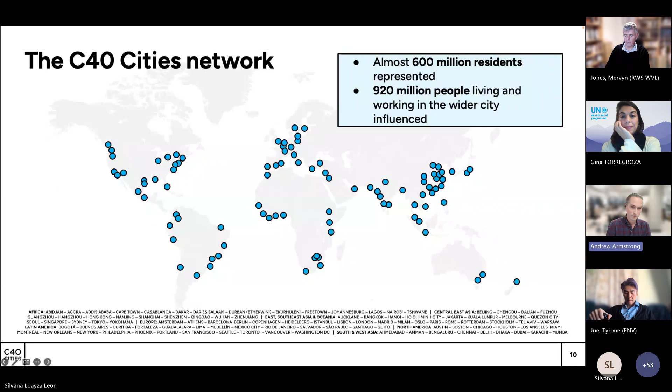So if that's who we are, a little bit of what we do. We do cover all sectors, but my focus and the topic of today's discussion is on energy and buildings. Focusing on building policies, mandatory performance standards. We look to support cities decarbonizing their energy supplies, switching away from fossil fuels towards clean energy and clean heat. But also, crucially, we look at embodied emissions as well, to address those hidden emissions of the built environment. And the term we use for that is clean construction, which we'll hear a little bit later on as well.

As we can see, buildings and industry account for the vast majority of emissions in C40 cities, and that energy use in those buildings contributes to air pollution issues as well. So how do we support cities? It's a peer sharing network. We focus on knowledge exchange and peer-to-peer learning. We also deliver direct technical assistance as well.

Crucially today, I'll be talking mostly about how we platform mayors and convene cities together to speak with one voice, to amplify that voice. And one of our key tools for doing that is our accelerators. So these are key tools for mayors to signal their climate ambition. They're public, so we get cities to publicly commit to them. I think that's the crucial element. Demonstrating that direction of travel with long-term commitment. So yeah, to the next slide, please.

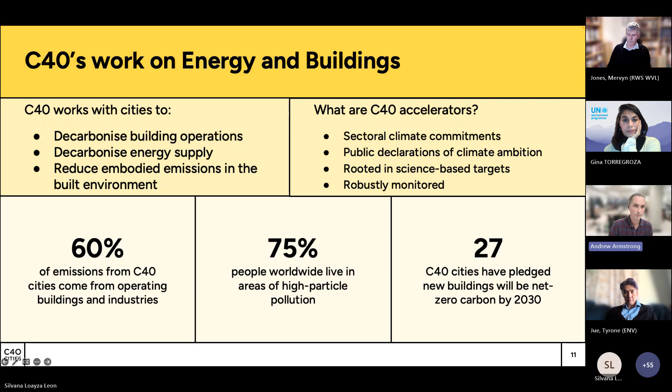And the first example I'm going to talk about today is the Clean Construction Accelerator. And as I mentioned, that's focusing on embodied emissions in the built environment. The way we structure the accelerator is through a prioritization framework, an action hierarchy, if you will, focusing first and foremost on the better use of existing assets, to maintain the buildings that currently are standing, to utilize them better, to expand them, to repurpose them, to avoid their demolition ultimately, and to make sure that we optimize them as much as possible.

We look to use materials more sensibly, so use recycled materials, use less materials, use bio-based materials as that second level. The third level is when we do design buildings, we design them better, flexibly, so that they can be deconstructed and contribute to that circular economy, and crucially that they're really resilient, so that they don't cause pain, suffering for those who occupy them, but they also do not get damaged easily in a changing climate, and protect the residents and occupants within them. And also then the fourth step is looking at zero emission construction sites as well.

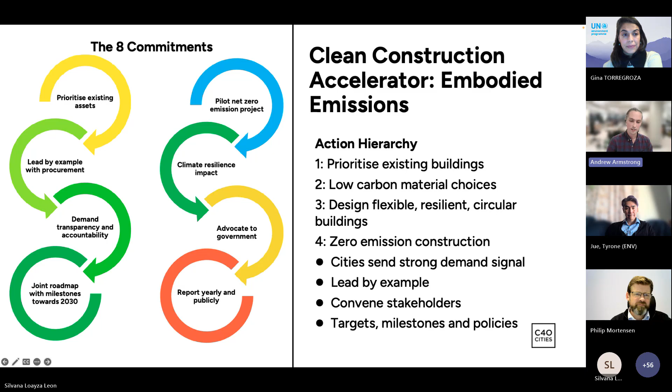But bringing together all of the stakeholders using these different levers and mechanisms is key to shifting the mindset of building owners, of building developers, of financiers, and the green public procurement element is that lighthouse leadership aspect, forging that path. So popping on to the next slides.

The other C40 accelerator I'm just going to describe quickly is our Net Zero Carbon Buildings Accelerator. So if we've talked about the embodied emissions, obviously the other huge chunk of the built environment emissions are the operational emissions. And together, they are a whole life carbon approach. And this is something that we are actively looking for actors in the field to consider side by side as a twin approach across all scopes of emissions in the built environment.

And so the operational emissions accelerator looks at policies to push new building codes to be net zero carbon, also that all existing buildings adhere to performance standards by 2050. And then the third element on municipal buildings is this really accelerated timeframe for municipal buildings to decarbonize by 2030, which demonstrates city leadership. As I said, it forges a path. It disrupts standard practices and spreads those innovative practices more widely.

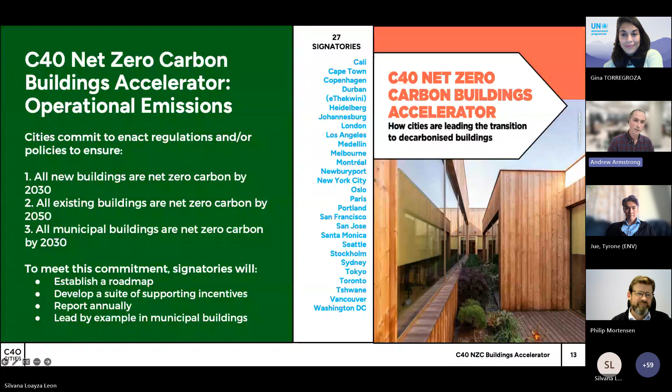I think I'm coming close to the end of my time, so I'll skip to the next slide and we'll see here that we have not just those two accelerators I've described, but all the accelerators on screen, which cover all sectors of mitigation, of adaptation, and covering all scopes in boundary within cities and also consumption emissions. So quickly in summary, they are rooted in science-based targets. They're public declarations. They are robustly monitored by us, and collectively aim to halve emissions by 2030, whilst focusing on that resilience aspect simultaneously as well.

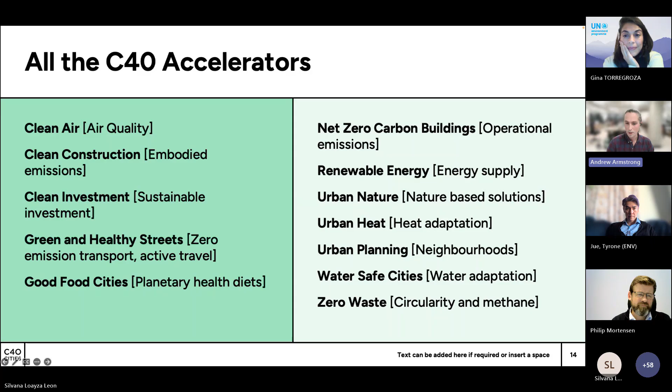I believe that now we can jump into our next set of presentations focused on best practices at local level. As a first speaker, if we move into the next slide, we have Philip Mortensen, who is a senior advisor with the City of Oslo and is going to present public procurement, reducing embodied carbon for construction at the city. Thank you, Philip. Please go ahead.

Thank you so much. So next slide, please. I'll just start off with saying a few words about our context, our policy goals. I'll talk a bit about our efforts on electrification of the construction process, and then I'll talk a bit about how we work with the requirements for low carbon materials. So please, next.

So these are the goals in the climate strategy, consolidated both by the city government and the city council. We have a kind of parliamentary governance structure in Oslo. And for those of you who don't know us, Oslo is a city of roughly 700,000 people. So the key goal and the high priority policy ambition is for the city to become virtually zero emission in scope 1, with all direct emissions, by 2030. This was actually an ambition that was taken in 2015. And a big part of our efforts have been to tackle that challenge to go fully zero emission in scope 1. Otherwise, we have important goals on reducing indirect emissions, energy consumption, climate adaptation, and also carbon storage.

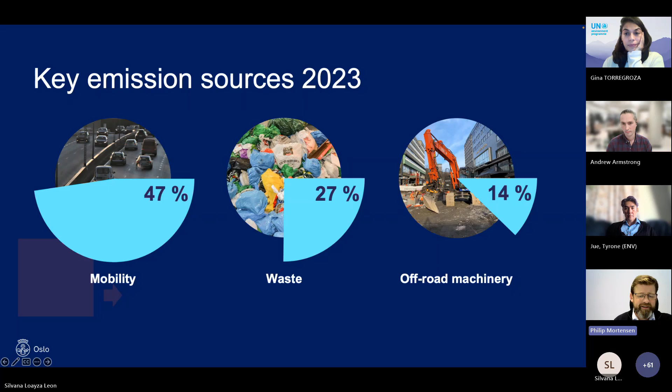So at the heart of this effort is our procurement strategy. Back in 2017, the city government decided that the procurement that the city does should have as a point of departure that the city aims to become zero emission. So basically this permeates through all procurement that we do, and also, of course, construction, that we should go forward with our own procurement. And in 2019, the city decided at the highest level, actually the governing mayor and his closest team, that we should award environmental performance in all our construction projects.

And as part of that, there was a kind of detailed prescription on how all the different agencies involved as a client to build different infrastructure and buildings should put 7% of the tender award criteria in the competition phase on the capacity of the companies to provide zero emission construction services. Also, transport of bulk materials and other transport is detailed in this framework.

And at the same time, in 2019, it was also stated very clearly and included in all contracts that by the 1st of January 2025, all works need to be zero emissions. So this was a very clear signal that if you want to do construction work for the city, then you need to have this capacity by 2025. So we gave the market 5 years to do this transition. Thank you. Next.

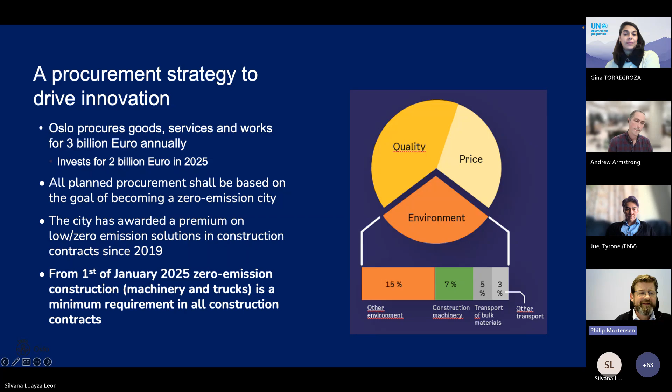So these are the numbers that we get from our project portfolio last year in 2024. And it's been really impressive to see how fast the market has responded on this. Back in 2019, there was no capacity and all was done by diesel or biofuels, whilst 4 years later, 85% of works is performed by zero emission construction equipment. So that's a big success for us. Next

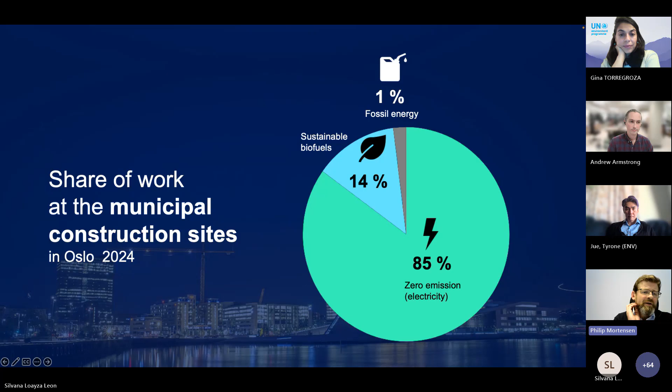slide, please. Yes. So this, of course, is a part of a long process. It started out when the governing mayor challenged the market: will you be able to build for us fossil-free using only sustainable biofuels? And the response from the market was quite clear. This is no problem. So in 2017, the city adopted a standard minimum requirement for all works to be fossil-free, served basically by either electricity or sustainable biofuels.

But the market response was also quite swift: we want to discuss how we can promote electrification, seeing that there are some sustainability issues related to the use of biofuels. So then we recognized the city of Oslo is small on a global scale, and we engaged with the C40 cities. Really happy to see that we were able to create this clean construction platform, and I think this is a clear part of our success, that we have been able to scale up this demand and create, through the C40 network, bigger attention on this topic to the big companies serving these markets and actually producing the machinery that we need.

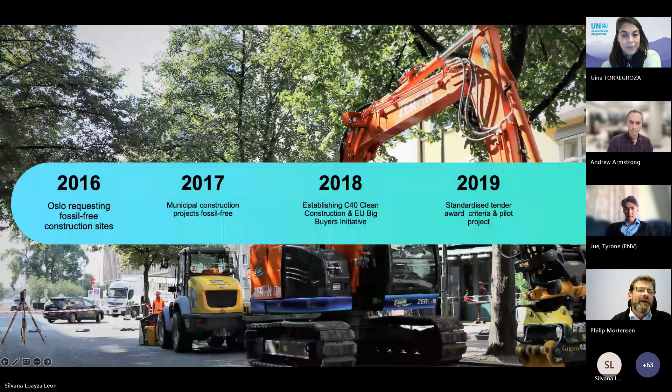So I've already talked about the standard requirements that we introduced in 2019. Next slide, please. And we did work also with the zoning permit requirements. I think this is really important that we show our own capacity as a client and a builder through our procurement work that we can work fossil-free. And then we challenge the private real estate developers and the market through our regulation, the planning and building authority that we have as a city.

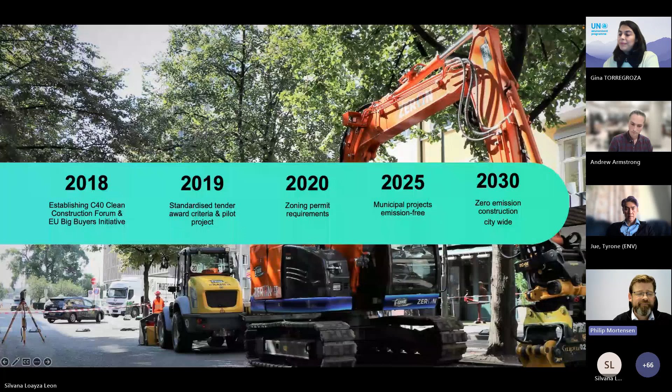So in 2025, we don't have the numbers for this year yet, but we hope to be very close to 100% electrified. And we have a clear ambition, and the city government has just concluded a public consultation on also having requirements for private real estate developers to go electric. Thank you. Next slide, please.

So then I'll talk a bit about how we work also with materials, because of course this is more complicated than electrification, but still the most important aspect if you look at this from an environmental impact perspective. So we build a lot of different schools, all kinds of purpose buildings, nursing homes, libraries, and we have standardized requirements for materials. Thank you. Next, please.

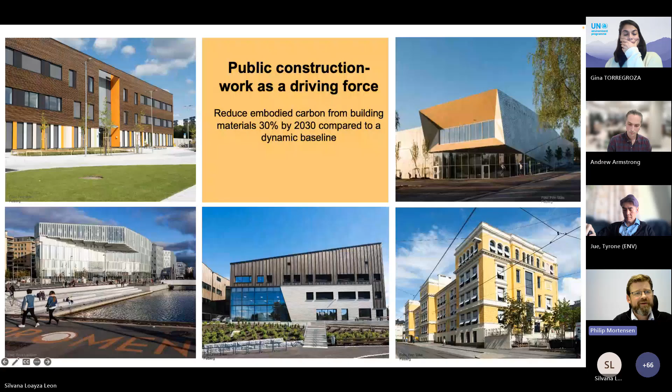So after a process involving also our purpose building company, the city government decided that we should aim to reduce our emissions from materials in our own purpose buildings by at least 30% by 2030 compared to a dynamic reference. So this actually means we aim to halve emissions compared to 2020 by 2030. So it's a high ambition.

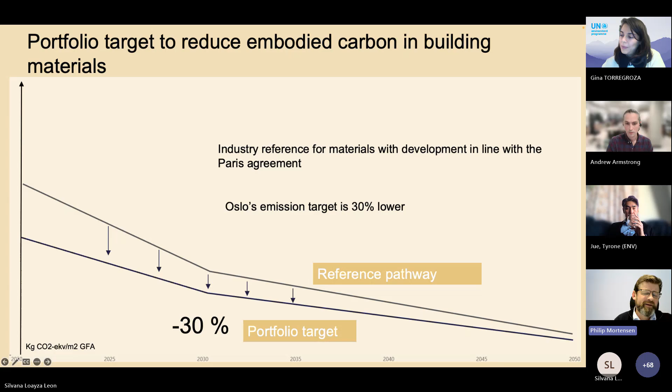Next, please. So the agency responsible for doing these construction works typically plots all their projects. And you can see in this slide how every project has projected impact when it comes to material emissions. The red dots are new construction, the green dots are renovation, and the dark green dots are a combined renovation and new build. And you can see very clearly that when you do renovation projects, you are able to produce square meters and volume with a very low impact.

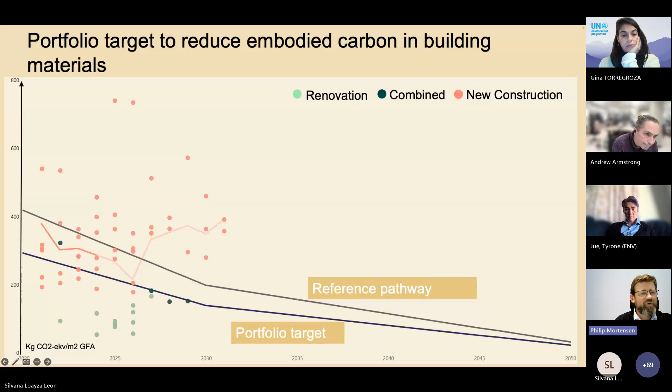And we see also that it's very challenging for us going forward from 2025 to actually achieve those low emission projects that we aim for. Next, please.

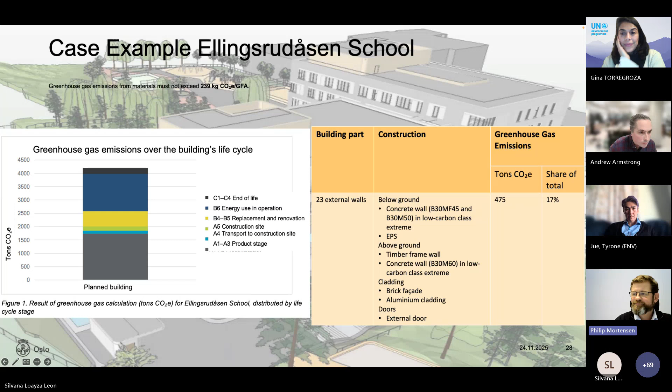So right now we have been working for actually several years to produce a comprehensive set of standardized material requirements in all the portfolio. It's important to highlight that the ambition that we had set on halving emissions from materials by 2030 is a portfolio ambition. So it's for the construction company to find ways also managing how much new build, how much reconstruction, and high level of flexibility on how to achieve the goal.

But with this next step, we are aiming for having maximum emission requirements for all the most important materials that go into a construction project, both infrastructure and buildings. And typically then on asphalt, concrete, steel, we set specific quantified numbers for limits, for example concrete, so that we make sure that the concrete that we use in our own projects is low carbon concrete, basically.

And then in addition, as a supplement to these minimum requirements, we have also these tender award models that will award the companies that are able to provide us with an even higher ambition realized than the minimum requirements set. So this is a combination of minimum requirements and tender award criteria that would hopefully stimulate the market to innovate and be able to provide us with low carbon solutions, more and more ambitious and more strict going forward.

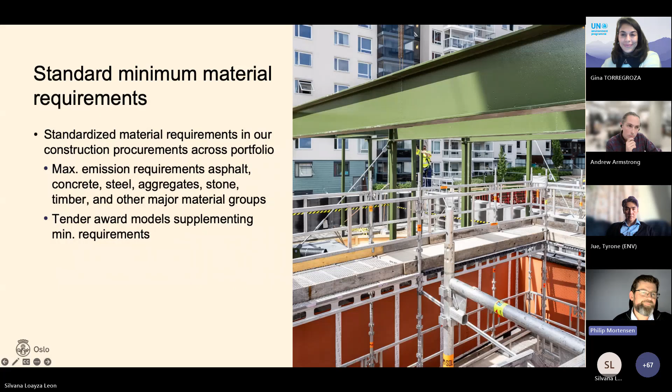Thank you very much, Philip, for presenting this really comprehensive vision and high ambition with very concrete targets, and also showing that this is a multi-year strategy and process to accomplish these results. Congratulations for the great work that you're leading, and thank you for sharing it with us today. It was very interesting. Maybe we can move to our next presenter now.

We have with us Mervyn Jones, who is representing the Ministry of Infrastructure and Water Management from the Netherlands, and has brought some examples on collaborative approaches to driving demand through sustainable and circular public procurement. Mervyn, please go ahead. Thank you, Gina. Good morning, afternoon, and evening to everybody.

As Gina said, I work for the Rijkswaterstaat, which is part of the Ministry for Infrastructure and Water Management in the Netherlands. And I'm going to be giving a couple of Dutch examples, but I'm also going to be giving an example from Wales as well, work that was done with the Welsh Government, just to highlight the link between circular procurement, circular practices, and also the Buildings Breakthrough resilient and near zero carbon buildings initiative.

The key message of my presentation and the examples I'm going to be showing is that procurement is a pivotal lever in reducing embodied carbon and operational emissions in buildings and the construction sector. Optimizing the benefits from demand-led approaches requires collaboration if it's going to succeed. We can't do this alone.

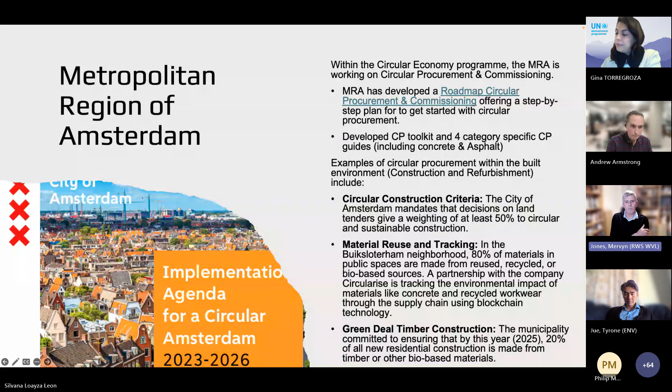Other examples that Amsterdam has been using in terms of procurement is looking at the environmental costs of materials use. So within the procurement, within the tender process, Amsterdam is using an environmental cost indicator as a way of managing the negative environmental impacts of extraction, production, transportation. So again, it's embedding these into its sustainability criteria within the actual tenders.

In terms of circular buildings, it's looking to set an example by entering into framework agreements for construction, in this case of 30 new buildings, including school buildings, and the first 9 of those have been tendered since 2023.

Interestingly, again, this comes back to collaboration. The City of Amsterdam is massive in terms of the Dutch economy, but it's not big enough by itself, and it's got a grant of 400 million euros just this year to build another 32,000 social houses. Social housing is a key issue, and housing is a key issue in the Amsterdam region, as it is in many large urban conurbations. But again, that money and those 32,000 social houses will be built according to circular principles.

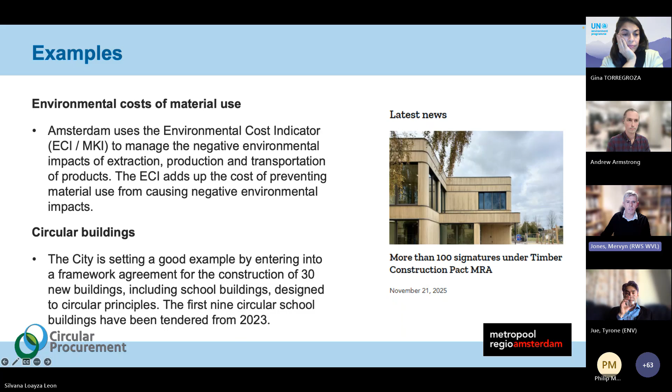Next slide, please. And finally, from Amsterdam, just a quick specific example. This was created back in 2017 by ABN AMRO, which is a large Dutch bank, as a learning hub for circularity. It's a pavilion, a learning hub, as I've just said, designed and constructed according to circular principles.

And that follows through, as Andrew was saying, not just in terms of the design, but in terms of the construction practices, as Philip was also saying, from the City of Oslo, also into the operation side of it. So thinking about materials components that have already been used, have already had a previous life, and specifying those reused components in the new building.

One of the specific elements that I wanted to draw attention to in terms of circular design is related to components and jointing, very technical in terms of the specifications with the design, but it's there to enable disassembly at end of life. So things like developing reversible connections between buildings, superstructure elements, allowing access to those reversible connections between the structure and the building services.

There's many examples where that particular element goes wrong, particularly when we're talking about refurb and maintenance further down the line. And then finally, developing and issuing a disassembly manual document for the building itself. Next slide, please.

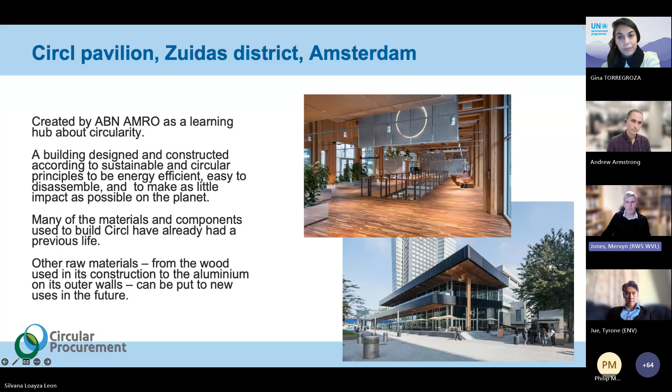Now, moving on from the City of Amsterdam, I wanted to highlight it's not just large urban conurbations. This is a pretty small city, both in Dutch terms, but also in European and in global terms, the city of Apeldoorn in the Netherlands. And again, I wanted to highlight the importance when we're talking about resilient and low carbon construction, and it needs to consider the impacts of the supporting infrastructure as well as the buildings themselves.

And I'm talking here about infrastructure such as drainage, groundworks, roads, etc., which can account for between 20 to 40% of the built environment carbon footprint. The influence of the public sector procurement is also highly significant within these infrastructure projects in a way that it sometimes isn't within the commissioning and the capitalisation and operation of buildings.

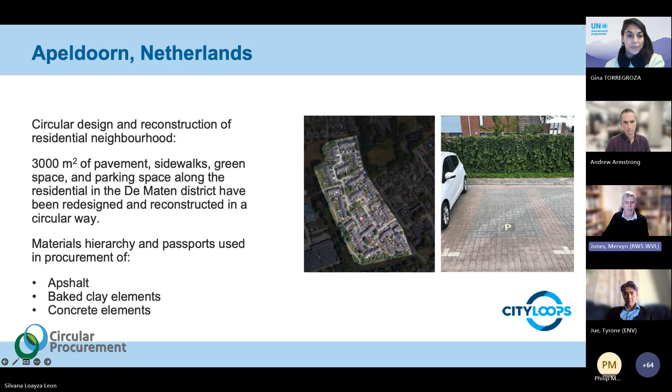Now, I'm not going to spend any time on this alone, but what I wanted to highlight was that the pilot that the City of Apeldoorn produced was part of a wider European project, an EU Horizon 2020 project called City Loops. And that project used the information from the pilot in Apeldoorn and 6 other small to medium European cities who were working on circular construction projects.

And it used that information to develop this generic guidance, of which this is just a snapshot example of the overview of where procurement sits within the construction process and what the opportunities are. So it's developed this generic guidance for construction projects across all stages from design to operation. And again, there's a hot link there that you can pick up that report from the City Loops project. Just a couple more slides now.

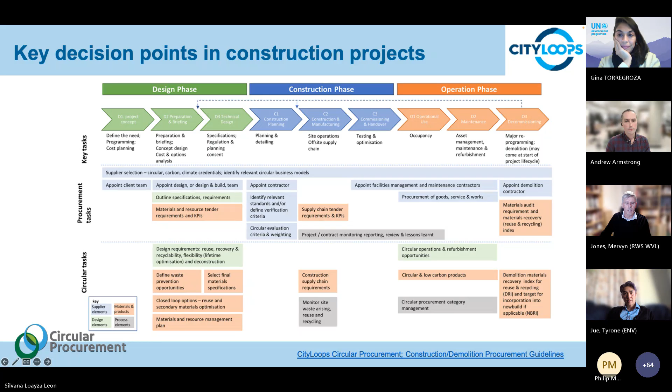So next slide, please. I'm now going to move from the Netherlands to Wales, just again to highlight the link between what councils, local authorities, municipalities can do at a municipal level in terms of carbon reduction. Cardiff Council is the largest council in Wales, and bringing it back to carbon, the 2022 Circularity Gap report highlighted that 11% reduction in material consumption in the built environment could lead to about 11% reduction in carbon emissions. So anything we can do in terms of the built environment is a one-to-one benefit in terms of carbon emission reduction.

Cardiff City Council have focused through their One Planet Cardiff strategy on procurement, and specifically on procurement and decarbonising procurement.

Evidence suggests that circular practices, such as the reuse of building materials, for example, are going to be necessary to meet these emission reduction targets, and that's what informed their policy decision to focus on this. It's a very persuasive link between circularity and carbon, and they've picked up on it.

So the socially responsible procurement strategy that they developed drives carbon reduction alongside wider social and environmental benefits and legal responsibilities. And Cardiff have recognised the role that it has in supporting other smaller councils within southeast Wales, collectively creating a procurement platform called the Ardal Partnership, which recognises and embeds circular procurement principles into processes and practices. It creates a demand-led approach, which is what we're talking about under this building's breakthrough theme.

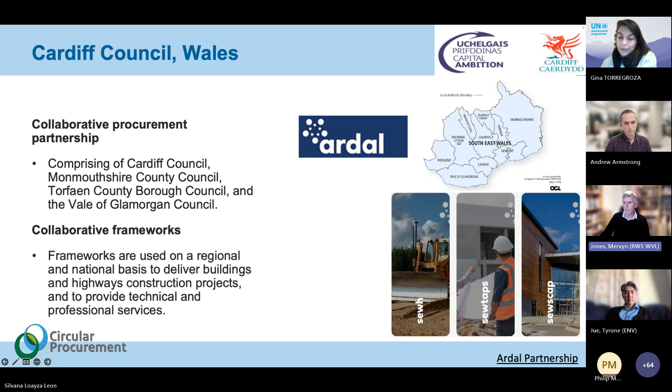Scope 3 emissions in Cardiff account for 86% of their total carbon footprint. And procurement, which is wholly in Scope 3, accounts for 94% of those Scope 3 emissions. So if you work that back to the total carbon footprint, procurement accounts for 81% of Cardiff Council's total carbon footprint. And the biggest sectors in there, as you can see, are indeed construction and infrastructure related.

So in line with UK government regulation, they now require contractors to have their own carbon reduction plans and targets. And on the previous slide, I did miss the fact that in terms of their own work, Cardiff Council and their partners through Ardal have created three frameworks around civil engineering, professional services in construction, and capital assets in buildings, where they're embedding these sustainable and circular procurement requirements into tenders, as you can see in terms of examples on the screen.

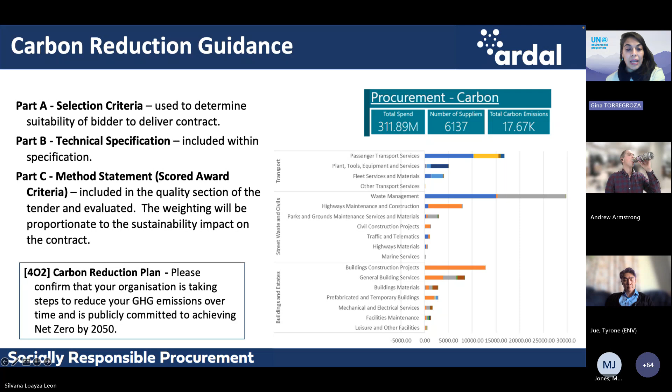So without any further ado, let's move to the next presenter. We're very pleased to have here Mr. Tyrone Jue. He's the Director of the Environment Department of the City of San Francisco in the US, and he's going to show us his municipal model for climate, circularity and health. Welcome, Tyrone, and thank you very much for being here.

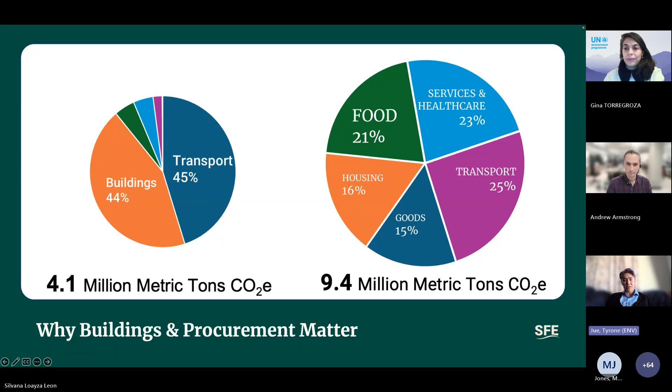In San Francisco, none of this work is voluntary. I think you've heard that theme already from the previous presentations. In San Francisco, we embed our climate, circularity, and resilience goals directly into our environment code. And this means that every municipal project, every library, health clinic, fire station, community center is legally required to meet performance standards. We organize this work around 3 central pillars.

Pillar 1 is around building performance standards. And so this begins at the design phase long before a contract is awarded. And as of our 2023 code amendments, every major project has to integrate whole building life cycle assessment to quantify embodied carbon. They have to use environmental product declarations for concrete, steel, and other key materials. We have electrification requirements that prohibit new fossil fuel systems from being installed. And we have high performance energy and water standards. And we do this in alignment with the US Green Building Council standards for LEED Gold or higher.

And to ensure that these requirements survive design changes and value engineering, our code requires that project teams submit updated performance documentation at every major design milestone. So this turns the design phase into kind of a longer arc climate phase. And it sends a very clear signal, not just to the architects, but to the engineers, the suppliers, and the contractors. So low carbon performance isn't optional, it's the starting point.

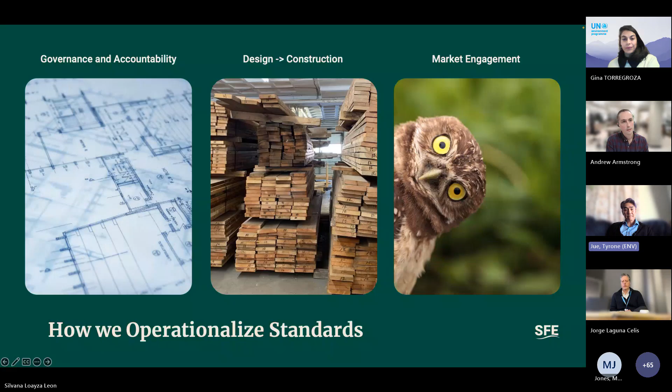Even in this challenging market, we're already seeing progress in all of our new projects and rehabs. All electric municipal buildings are now standard across our portfolio. Suppliers are increasingly providing environmental product declarations because they already know that our projects require them. So they're coming ahead of time. We're not having to educate them as much anymore.

We have deconstruction and salvage requirements that are growing the secondary materials market. And because of that, we're starting to look at scaling local facilities. Low toxicity materials and PFAS-free products are becoming more available and cost competitive. And we've already seen the resilience codes start to deliver new solar storage systems for community critical buildings like some of our libraries that we're constructing now.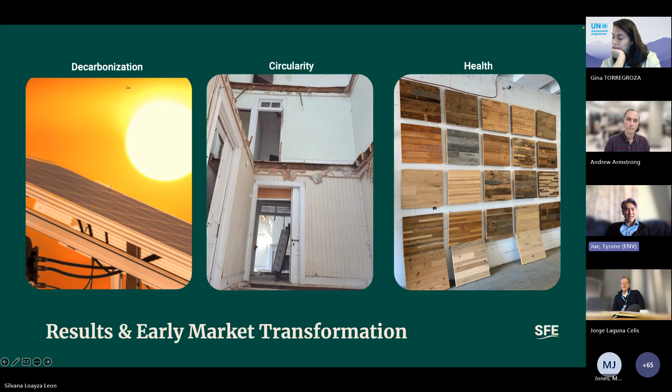And none of this is happening by accident, and it's happening because the procurement rules are very clear. The expectations are durable. We also have those quality control checks, and we create that consistent demand signal. Next slide.